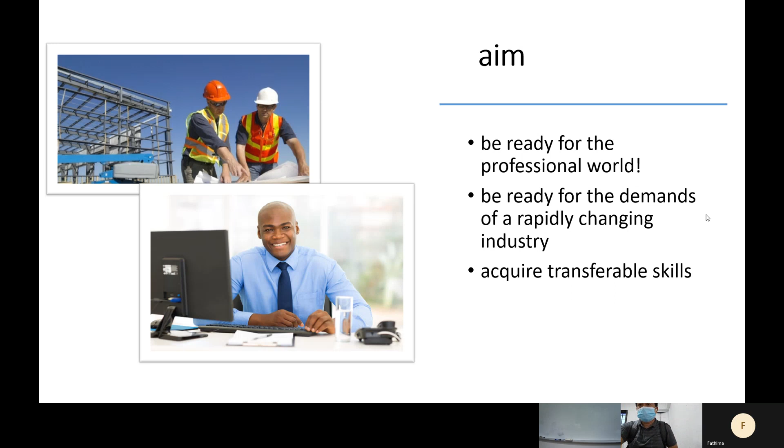So the outline of this course is like concept design of the structure, loading, design actions, timber beam design, RC reinforced concrete slab design, steel beam column, composite structure design, finite element simulation using ANSYS.

So has anyone got any experience about the finite element simulation? You have, right Daniel? Yeah, we did it for the design analysis module. Oh, we did it just before where we did it with hydraulics, so it's the influence of fluids on structure. Okay, it's hydraulics. So in your real working experience, do you touch any finite element? No. Okay, way outside of our wheelhouse. Oh okay, yeah I see.

In the designer's world, we ask the question, why does this not work? Please tell me why this doesn't work. Yeah, that's where we end up. So any other classmates have any experience on the finite element simulation? No. Okay, so it's quite a new topic for you.

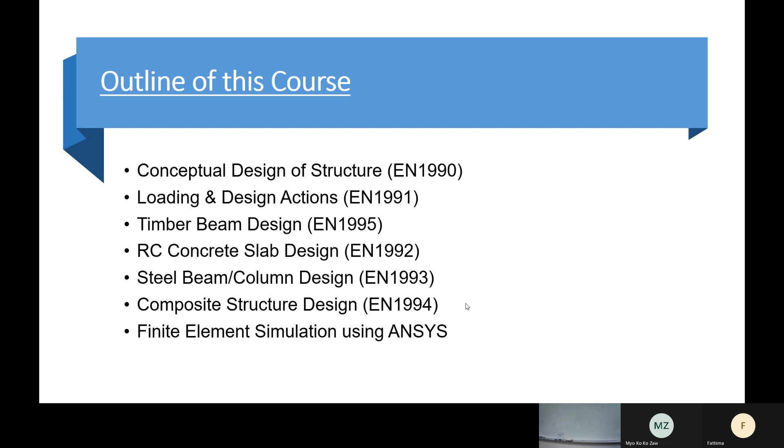Before we do that, I don't have a clear idea of your background, like mechanical background or your understanding of basic concepts in civil engineering. I hope you can let me do a small game-based test. It's simple, no marks. It just lets me understand your background more so I can adjust my pace, even my schedule and organization of the slides, to help you learn more easily.

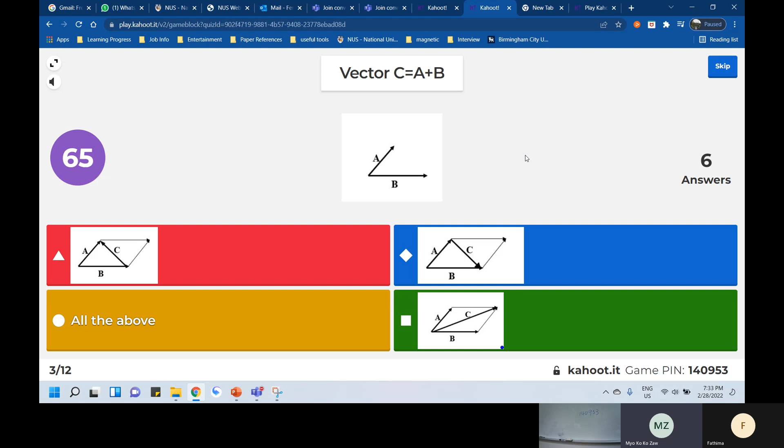We have 6 answers. Okay, no problem. Pin is 140,953. Okay, we continue next. Total, I think around 10. So then climb up again.

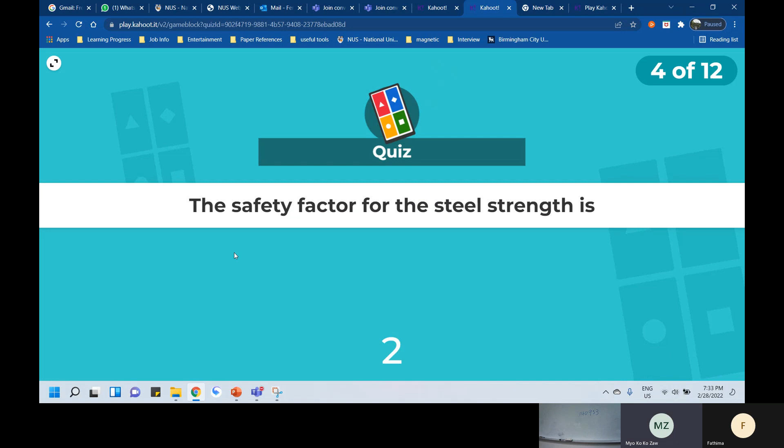The safety factor for the steel strength. Not sure you remember this value, or whether you are familiar with what is safety factor for steel strength. It'll be the connection. Oh sorry, it's got a bit loose, sorry.

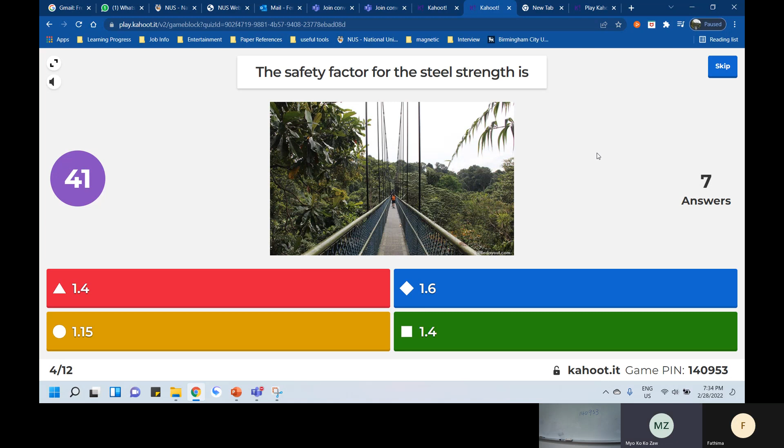I have 5, 7. Okay, at least you should understand what is safety factor. So this is more important. The value maybe you don't remember so clearly, it's okay. So I want to highlight is a safety factor. Never mind, okay, the new one come up.

Let's see one: the main failure of the slender beam, slender column. Is it compression failure, buckling failure, bending failure, or none of the above? Slender column. So some concept is a slender one. You see, yeah, never mind, it's okay.

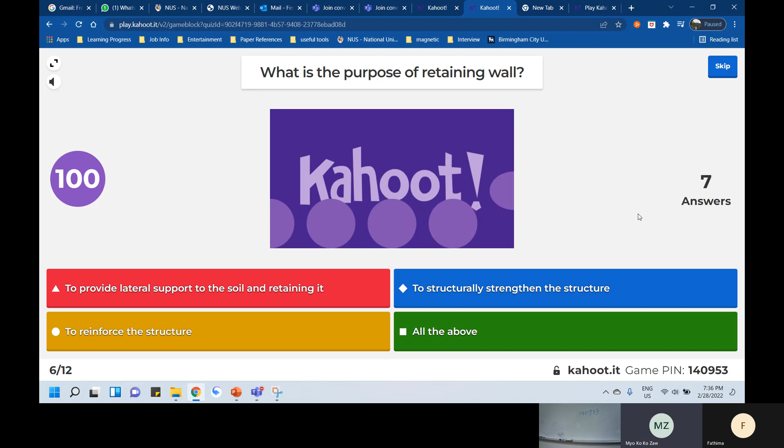Okay, let's see the next one. Retaining wall, it's more like some geological or something. Retaining wall, I think the... okay, this one actually a lot. Okay.

Let's see the 7th, this is another definition. It's maybe some basic one. If you don't know, it's also okay. It's just to let me know your background or something. Short unbraced column. It's okay, just think of it as a game. It's anything, it's just a...

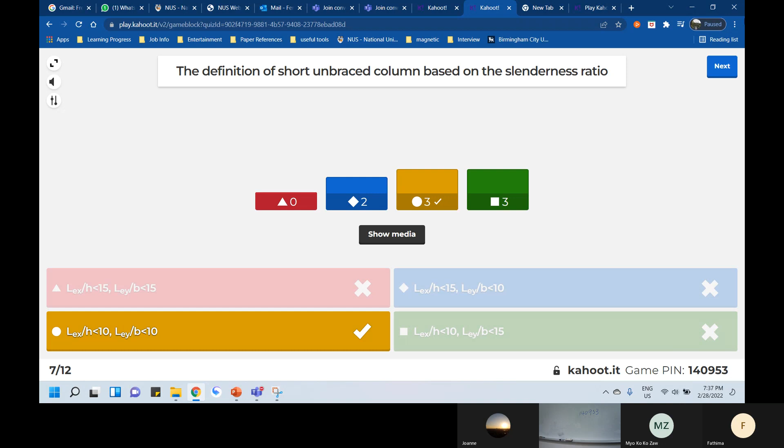I will see the report, it's very useful for me. So try best to do. I think it's just the value. You know it, choose the smaller one. Okay.

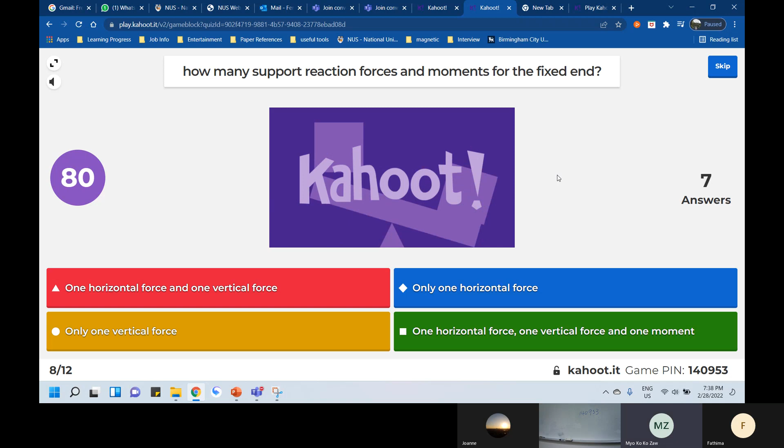Support reaction forces and moments for the fixed end. What is fixed end? Reaction forces and moments for the fixed end. We have the roller supported, simple supported, pin supported, and also fixed end. Okay, still up here.

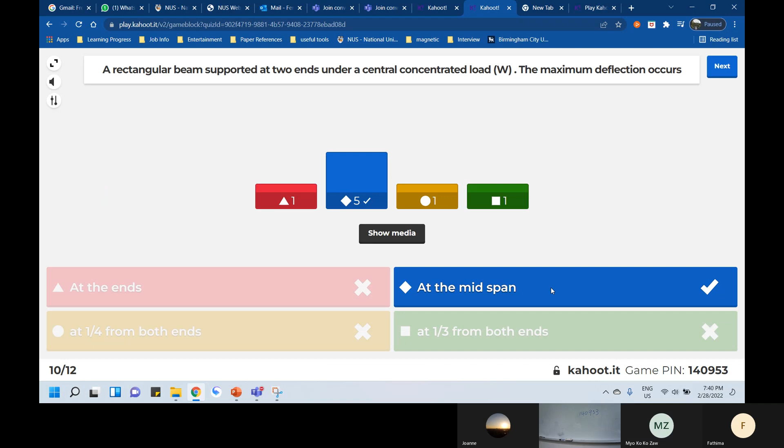Okay, so this is... okay, done. Okay, final two: which one is the serviceability limit state? I'm not sure you are familiar with the serviceability limit state. This one we also will explain today about serviceability. Okay, only one, no problem. Today we will explain more.

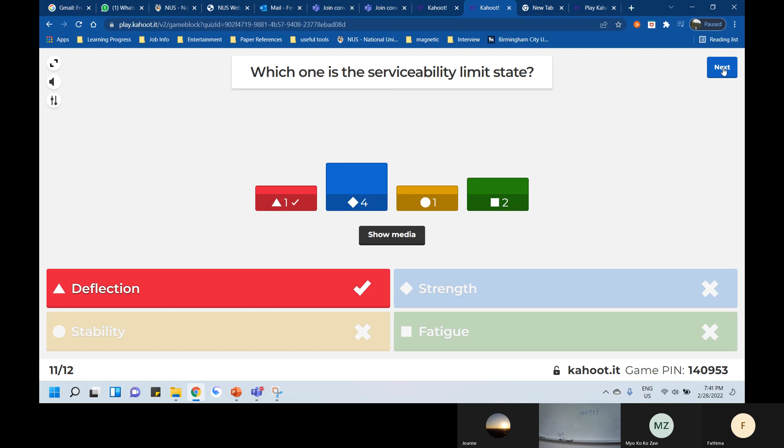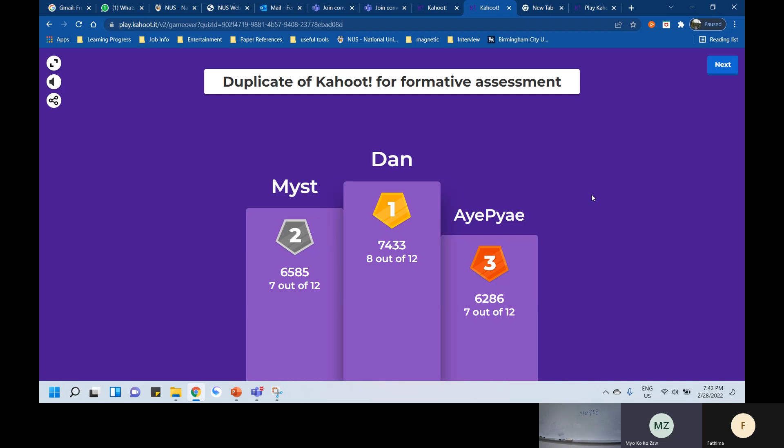Okay, that is ranking number one, so good. Actually it's correct 8 out of 12. So 2 is Myst, and AyePyae is 7 out of 12. But it's okay, it's just a small game to check your understanding or something. It's just for me to see... for example, I will see the report. It's for me about your understanding, especially like the mathematics, the concepts, or any mechanism you don't understand.

So something I will highlight and enhance in the slides. Okay.

Okay, so this one also you will check. This is some, how to say, fundamental concepts we will actually use in the design work. Even we use some moment diagram or shear force diagram, we will use it. And even when we use software, we don't need to understand so much, but it's better for the engineer to understand the background philosophy behind the software, so we can also check by ourselves whether the software is correct or not. So it's not just learning how to use the software, but to understand the mechanism.

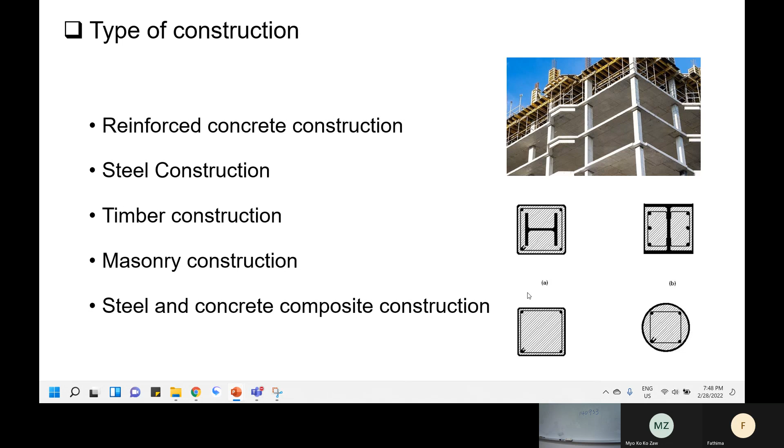I'm not sure if you've heard of Richard Liew. He's a quite professional engineer, also a full professor in NUS. He's quite famous for steel concrete high strength composite structure construction.

For example, steel and concrete composite structures are often used in bridge structures - highway and railway bridges. They have a higher span to depth ratio and reduce deflection. Deflection is actually something I want to highlight.

Deflection, as the question implies, is like when we have a beam - if we have a concentrated load, it will take on a curved shape. We call this deflection, which is just a deformation. Through these composite structures, deflection is reduced because deflection is actually a design limit - it's a serviceability limit state design consideration, and we want to reduce it.

This figure shows some work done in a NUS lab. This is a quite common setup with shear studs and shear connectors connecting the concrete with steel plates. This is the typical composite beam.

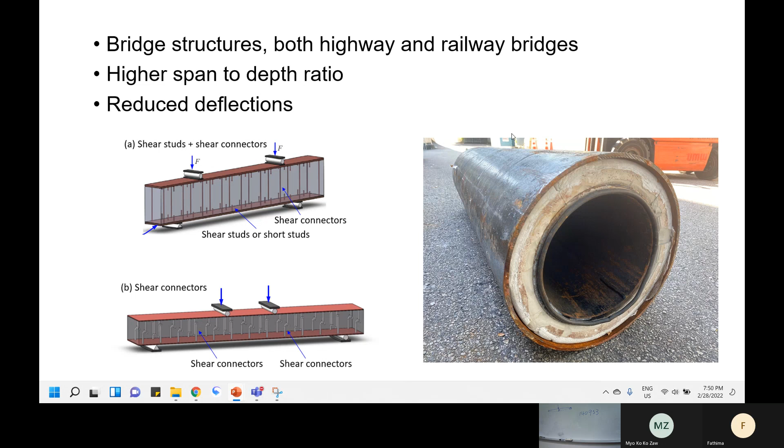This is another project, for a pile. The outside is a steel tube, and inside there's also a steel tube, with concrete between them. This is a typical steel and concrete composite structure, a little bit different from reinforced concrete structures.

In the design codes or standards, we need to consider all the different design situations, starting from the transient design situation. It's a period much shorter than the design working life, usually during execution or repair - a short term effect. Then the persistent design situation is long term, usually after we finish the execution or construction. A building must have a design life like 50 or 100 years, so these are long term effects.

In places like Indonesia, Japan, or China, we have the seismic design situation because earthquakes can cause quite large damage. And there's the accidental design situation - in our construction we consider it, but it's more common in defense construction, civil defense areas, especially for explosion or fire resistance. In Singapore, civil defense has many projects checking concrete for bullet or explosion damage, and how beams, walls, and columns behave under explosion or attack. So we have different design situations in all the design standards, but today we'll mainly focus on the persistent design situation - long term, not considering seismic or accidental design.

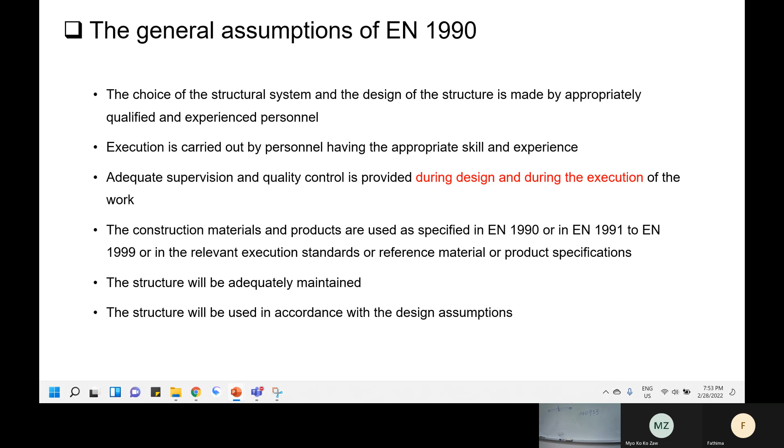Adequate supervision and quality control must be provided during the design and execution of the work. As a design engineer or structural engineer in the design phase, your responsibility is quite important, because almost 20% of failures, like for bridges, are caused by design civil engineers doing wrong calculations or not considering enough actions in reality, which causes failures.

This is some requirement, similar - it's to sustain all actions. No need to remember, just understand: meet the specific serviceability requirements - structural resistance, serviceability, and durability.

The structure should be designed and executed such that it will not be damaged by events such as explosion - this is accidental design, impact, and also the consequences of human errors.

So can any students tell me your understanding of human errors in design or construction? Have you encountered any human errors that caused disaster or damage to structures? It was a setting out error - piles were put in the wrong places. They had to recheck the beam to see if the span still worked with the pile in a different location, and the beam still worked because of the safety factors. So following the check it was okay, but the safety factors allowed the capacity in the beam despite the pile being in the wrong place - purely down to the setting out error, a human issue. Any other human errors you think of or have encountered in any phase?

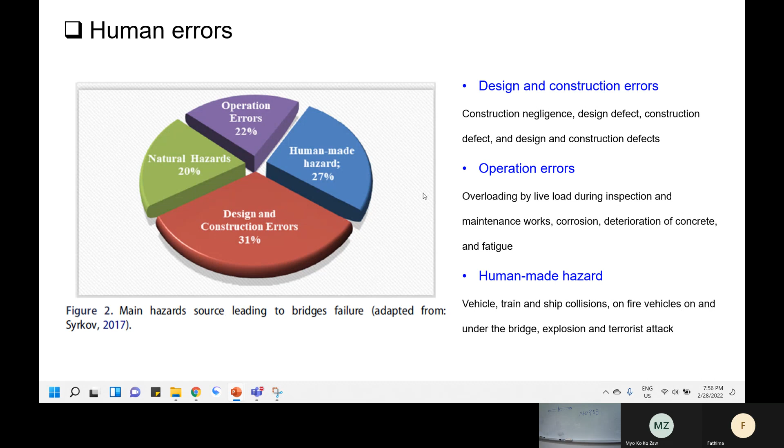Another requirement is the choice of suitable material, appropriate design, detailing, control procedure, design, production, execution, and use relevant to the particular project. These are not just words, they are real research or engineering topics we work on, like developing new 3D printing concrete or concrete made from solid waste. So this is the choice of suitable materials.

Appropriate design and detailing - have you encountered building information modeling, BIM techniques? Usually we want to combine design and construction together in a software. BIM is a hot topic now, along with specific control procedures for design production, like automation or tools for different production execution plans. There is a lot of work behind these different requirements.

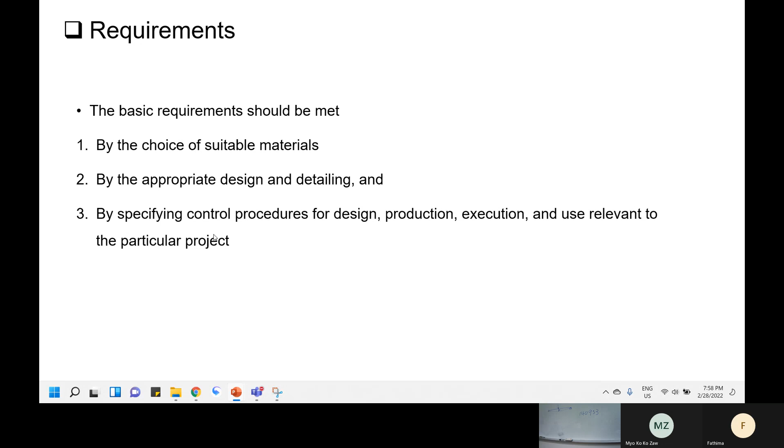Next is reliability. Do you encounter any reliability concept in your life or experience? Or do you think why we need to consider reliability? Any ideas? More cost - reliability is about controlling the cost of this project. Controlling the cost, okay, maybe any other source?

Reliability is being able to plan. If you know something is going to happen consistently, you can be efficient, and make it cheaper over the long run. You know it's going to work that way, and in a system it might be how a beam works, reducing maintenance, paint spec, all those kinds of things. You know it will work for a certain period of time, so you can plan ahead and make that more efficient long term.

Yeah, that's a good try, but that's not quite why we need to consider reliability. Making a plan is good for efficiency and securing the schedule, but that's not really why we need to consider reliability. Any other source? What do you think is the meaning of reliability?

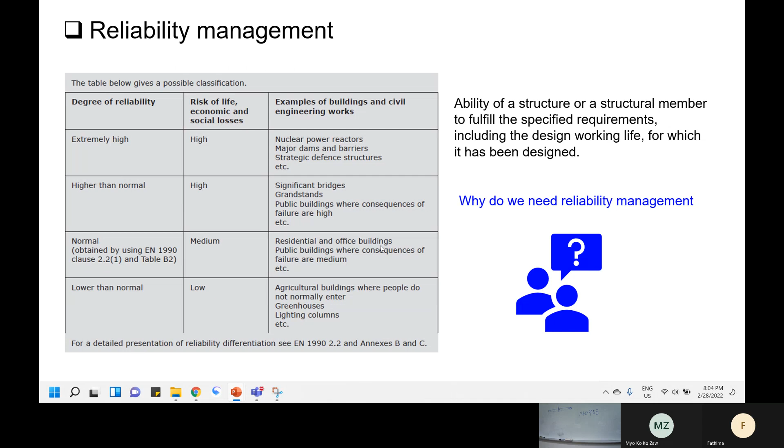Okay, maybe before we take a break, let's watch a small video just to give you a hint of the next session.

So this video simulates the Titanic sinking. The question is: what types of failure occurred in the Titanic sinking? What do you think caused the failure of the Titanic, or during the breakup, what failure, consideration, or mechanism caused the failure of the Titanic?

Any ideas? Collision with the iceberg? Yes. Then leakage, flooding? Yes. Any other thoughts? As soon as it lifted the tail into the air, it couldn't take the bending, so bending failure occurred due to moments. The ship itself wasn't designed for that much weight cantilevered from the sea, at which point it failed.

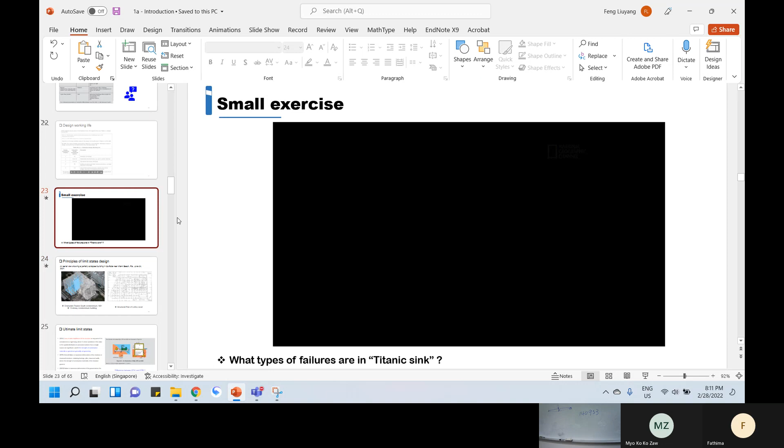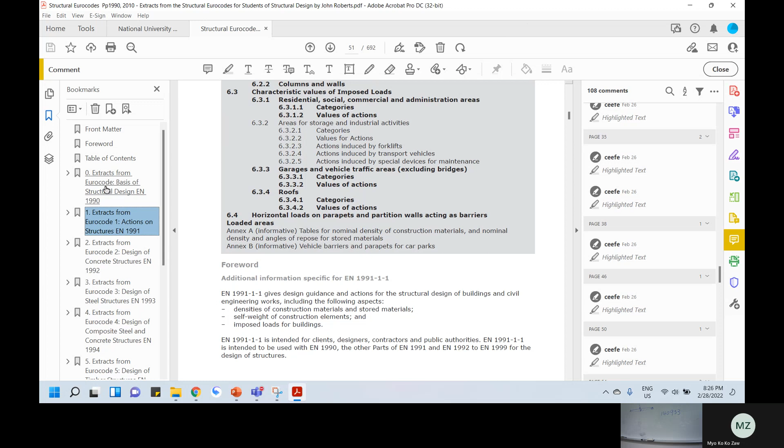So for the Eurocode basis of structural design, there will be a file called the structural Eurocode. It's a summary combining different parts like 1990, 1991. It's more summarized, compressed and concise work of all the Eurocodes. So you can learn from this one, using it to learn new concepts and understand them, because every Eurocode has a lot of concepts, too many formulas, and it's not easy to understand.

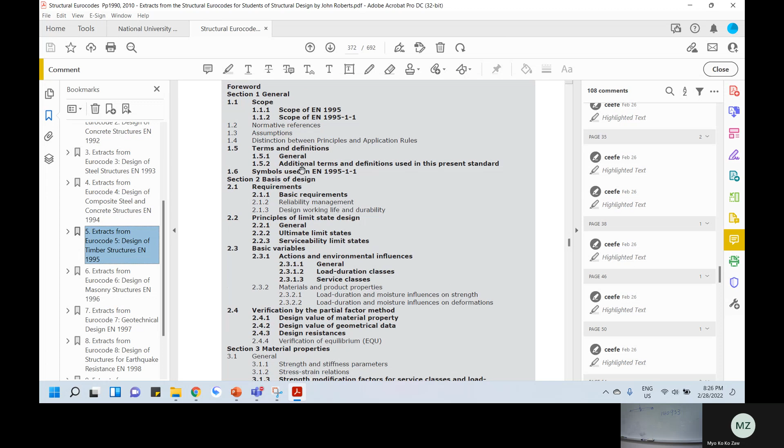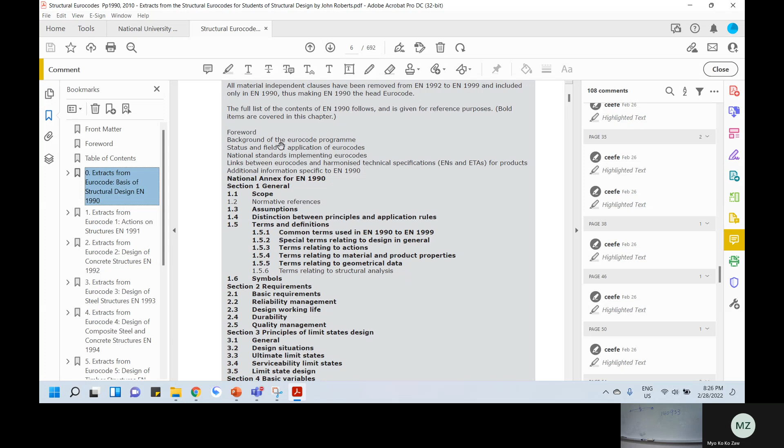I suggest you use this one first. It's in the link I sent you, the Eurocode basis of structural design. Then if you have the structural Eurocode 1990, this one extracts from the structural Eurocodes. This one is maybe the starting point, easier for you to learn all the key or critical things of all the Eurocodes. But it still has a lot of formulas and concepts to understand.

So actually, I believe for you guys, the course is just some effort to read it and understand it, not so many difficulties. Just start reading it, to understand it. For this course, our design is only a 3-story frame design using ANSYS.

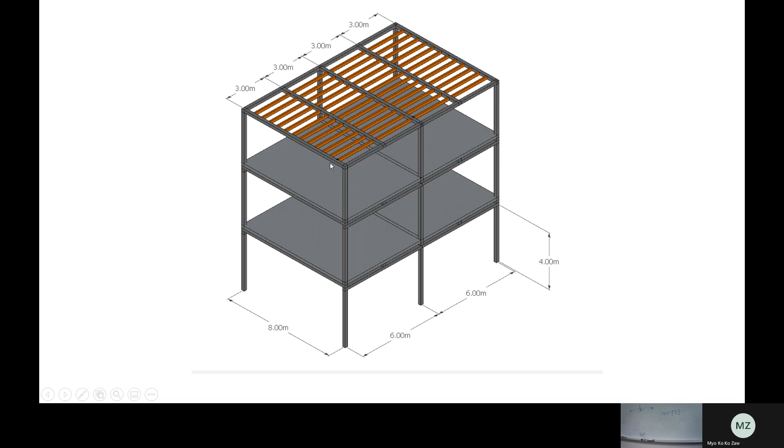It's much easier just using the software. The main thing in the software is how to build this geometry, how to give load, how to do the analysis, set the boundary conditions, then let the software solve the other things. You will get the solution - every location's stress, displacement, strain - because it's not so much relating to analytical or mathematical issues.

Okay, our next session will mainly focus on limit state design. This is the main concept or key concept in design. I'm not sure whether you heard this news - in Miami Beach, Florida, USA, in June 24 last year, a 12-story condominium building suddenly collapsed.

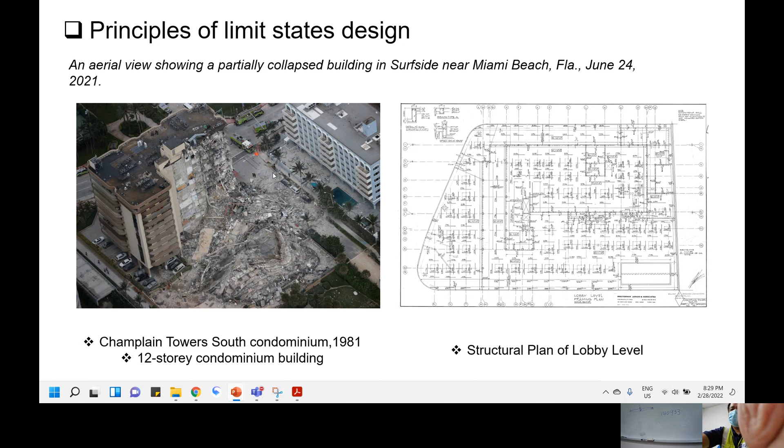Part of the building collapsed. This is the original filled building - if you draw the original one, it looks like this. Almost half this area collapsed. This one is a quite typical frame building. As you can see on the right, the structural drawing is just a lot of reinforced concrete columns, beams, and some walls.

So it's a typical one, more complicated than our assignment or coursework, but it also shows us how we should design to avoid this collapse based on limit state design. Limit state design divides into two parts. Let's draw a framework for today - one we call the ultimate limit state design.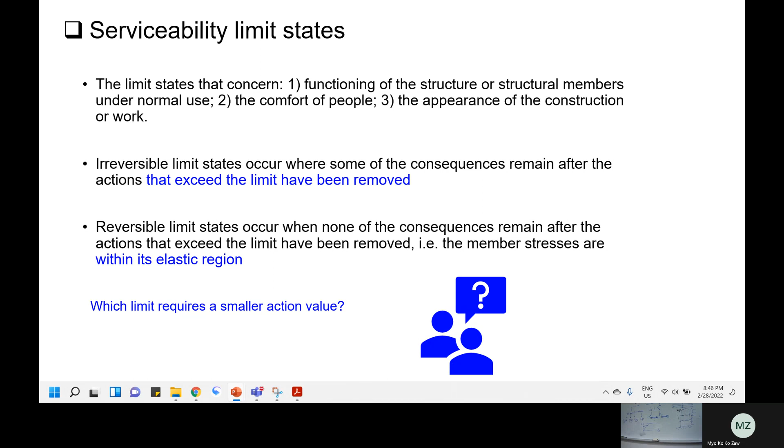So today is mainly this one, the different concepts. I hope you can understand the different limit state design definitions. The formula for different limit state design will be elaborated next, this Wednesday, about the different equations. But today, first understand the concepts of the different limit state design.

So let's do a small question. Which is ultimate limit state design, all these things? Which is the ultimate limit state design we should consider? Fatigue. Strength, come on. Stability.

Which is the serviceability limit state design should consider? Deflection. Durability. Local damage, local damage.

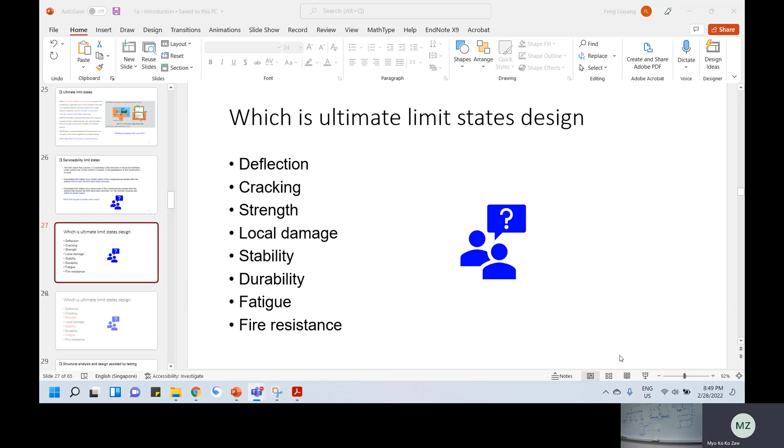So in this way, cannot see - you cannot see the book, that's very small. Oh sorry, the PowerPoint slide I can see, yeah. Oh sorry, give me a second. Now you can see. But still small, it's okay, never mind, just too small to see the PowerPoint slide. Later I'll take a picture for you.

Okay, so how do you guys think about the ultimate limit state design and serviceability limit state design? So deflection is what? Serviceability. Deflection means deforming the shape, the bending or sway or something. Yeah, deflection is one of the deformations, so it's for the serviceability limit state design.

Cracking is relating to the appearance of the structures, so it's also serviceability limit state design. Strength, we call STR, is relating to the ultimate limit state design. Local damage also relates to cracking, so it doesn't belong to equilibrium, STR, geo, fatigue - so it's also serviceability limit state design.

Stability is about the loss of equilibrium, so it's ULS. Durability is serviceability design, fatigue is ultimate limit state design. Fire resistance is for the comfort and safety of people, so it's serviceability limit state design. So of all these, only strength, stability, and fatigue belong to ultimate limit state design.

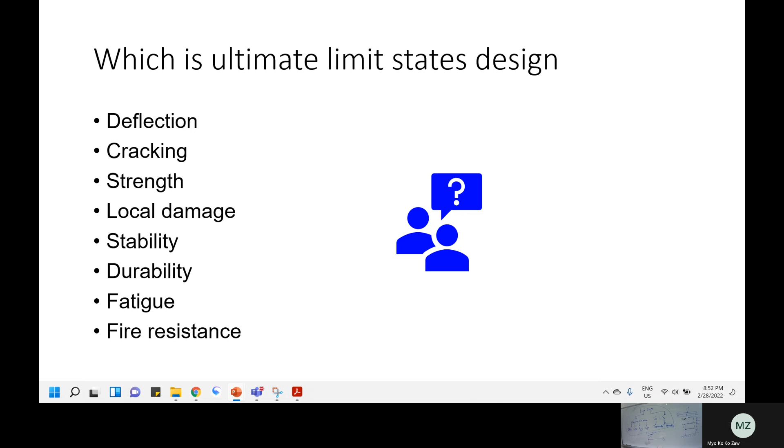Based on this design, what we need to do is the analysis of the structures based on different principles. So structural analysis and design assisted by testing is what we will do, and it is also included in the standards and codes.

The first one is structural modeling. In the codes or standards, we have a lot of equations and formulas. Where do these come from? From the experience of engineers, and also from structural modeling. So calculations shall be carried out using appropriate structural models involving relevant variables. For example, we can use FE analysis to do the structural modeling, which we will do in this course.

They also need to consider static actions and dynamic actions. Static action is like the density of the structure or the self-weight of the structures. Dynamic actions include wind load, wave load, even seismic load, because static and dynamic are quite different in terms of amplitude. Static, the amplitude or load is almost constant along with time, but dynamic has some variation, it will show like this. So seismic design needs to consider earthquakes, or even wind load. In a bridge, there will be some vehicle load. So these are called static and dynamic actions.

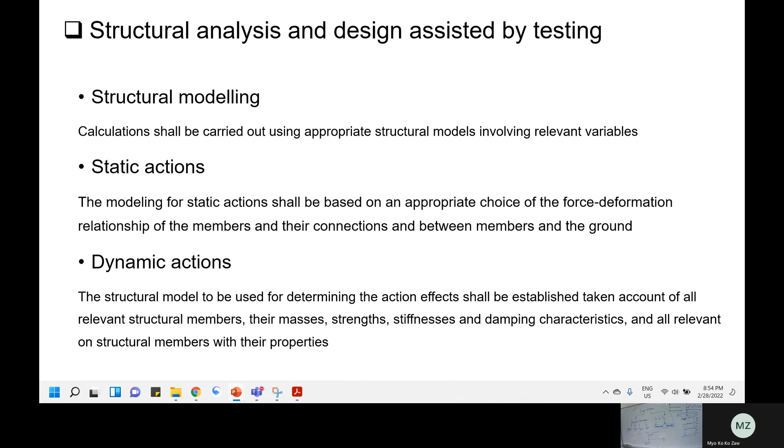This one, no need to remember, just to help you understand more. Ultimate and serviceability design - these are the general steps here. I show this for your reference in the future, maybe if you're interested in research or more work you can do.

The first step is determination of the loads or actions. For example, we want to build a building in central Singapore, the CBD area - say a 12 story condominium. We must understand the conditions of these areas. So we need to decide the loads or actions: whether the wind load is big or not, how many people will live here.

Of course, in offshore and marine structures, it may involve wave-induced loads and wind-induced loads. In mechanical areas like semiconductors, we may need to consider thermal action, because for semiconductors the temperature may go up and down, which will also cause deflection or deformation of the small parts. So first, determination of the loads or actions. For this part, we need to consider uncertainties relating to reliability, statistical distribution, characteristic and design values - these new concepts we will elaborate on in the following courses.

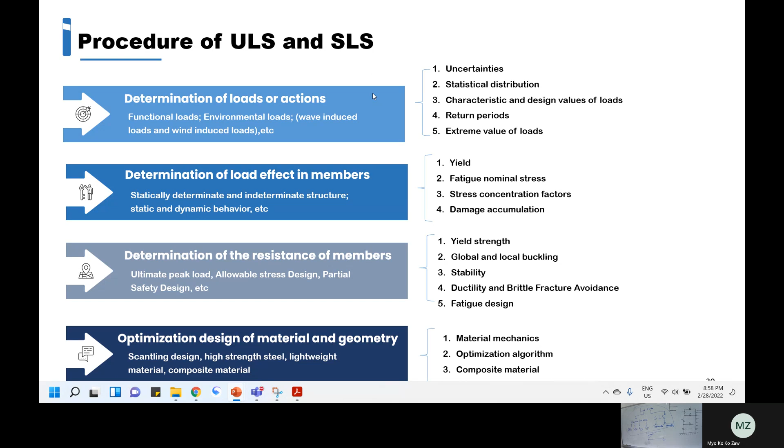Next we do the initial design, then go back to do the optimization. We improve our design cycle by cycle, by different engineers, we improve it. Finally, we get a final design of the 3-frame building. So it's similar to your work assignment in this course.

Other thing, no need to remember this one, but remember it's a concept I already explained. So how we do the design, we have different methods. For example, we can use analytical approaches, experimental approaches, numerical approaches.

So this is the concept of ultimate limit state design. I use experiments - not sure if you've seen this one or not. This is the member, a small member, clamped on the two ends, then pulled. If we pull it, we will get the strain and stress, following this curve.

As you can see, it's first elastic, then plastic, then final failure. So they have different stages. This is yield strength, and this is ultimate strength. So the ultimate limit state design is for this one.

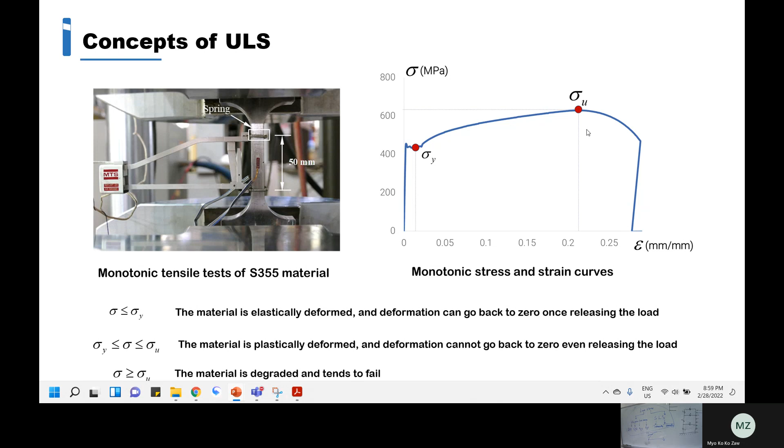We must make sure the stress on the member is less than the ultimate strength. So it's stress less than strength. Strength is a material property, stress is the external load. So these are different methods we do.

Do you guys still remember this one? The stress is equal to moment divided by the moment of inertia, times y. I'm not sure if you still remember how to determine the stress.

Let me draw this one. So if it is a beam, under a load, the beam will have a moment. We call this M, it's a moment, a couple moment. Then the stress on this section - stress equals the moment times the geometry parameters, times the location of the stress.

For example, this stress here - this is stress because stress is linearly distributed, not uniform, caused by the moment. So y is this, this is x, this is y. Based on the different y location, the stress is different. So you can say stress is caused by the moment, and moment is an external action.

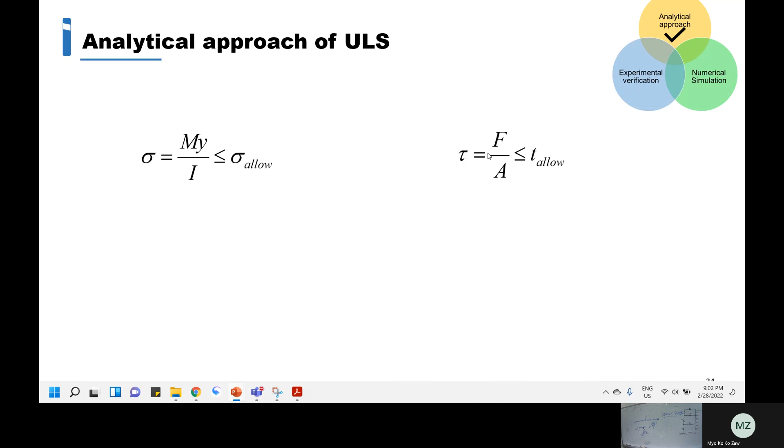Then tau, we call tau the shear stress. We will also have a shear strength, but this is not part of the basic design concept.

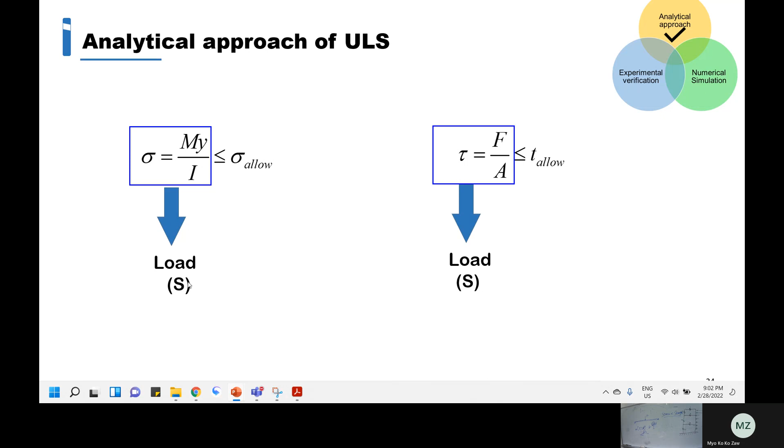So we always see the load, which should be smaller than the resistance. The right part is the resistance of the material, the left part is the external load. So usually the load effect should be smaller than the resistance. This is the key principle for all design, whether it's ultimate limit state design or serviceability limit state design - all need to meet this one. The load should be smaller than the resistance.

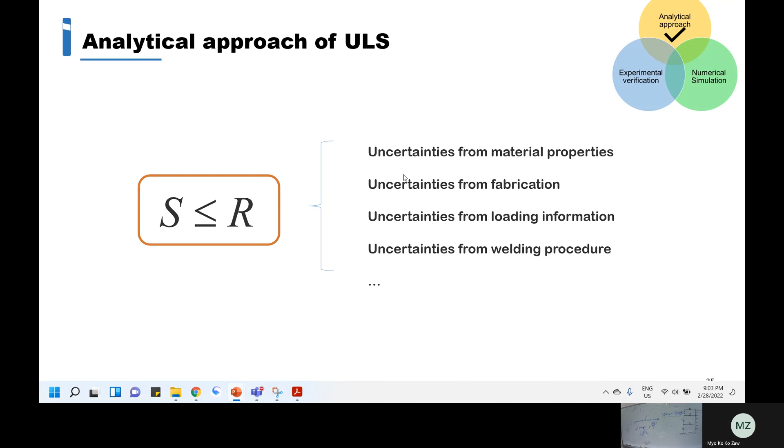Of course, based on this one, we can do a lot of work, even research, on uncertainties of fabrication, because it has uncertainties. So we will have the probability - no need to remember this one, just for information. It has a distribution for different members.

That comes into our safety factor or partial factors. Partial factor or safety factor considers the uncertainty in the loading and in the material properties. This we will explain in more detail in Wednesday's lesson, but it comes in - the logic is from this one. If we consider different uncertainties, it comes into the partial factor and the safety factor.

That's why in the previous small game, I called it the safety factor of the steel strength. I'm not sure if you still remember - safety factor.

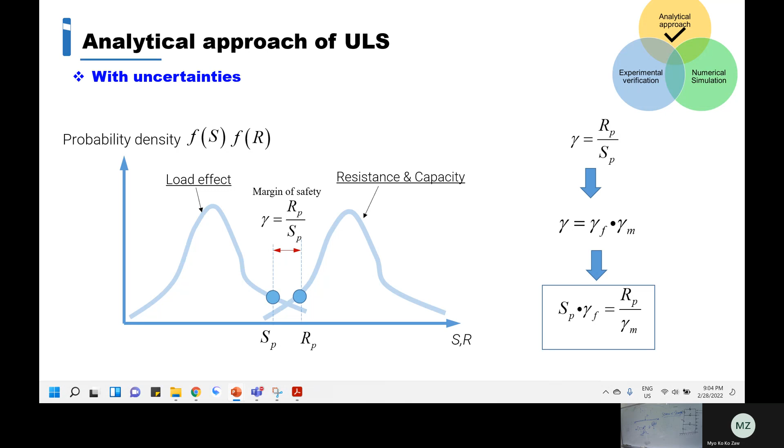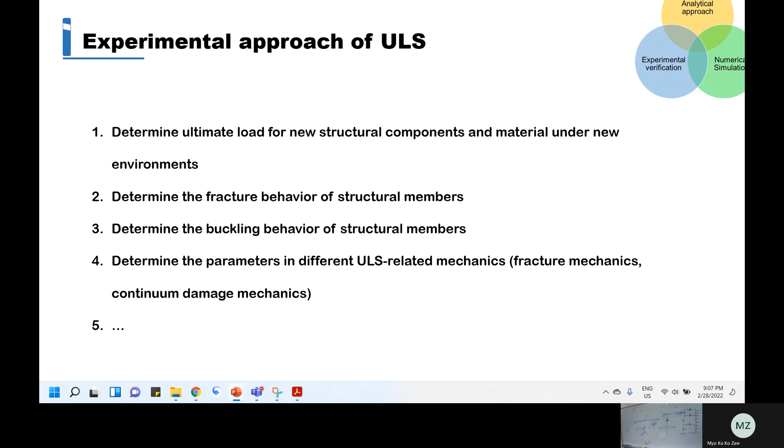We do the numerical simulation to simulate the failure. Numerical is a simple and cheap way, because it just involves working in front of the laptop or workstation - key in the parameters, build the geometry, key in the load, then let the computer solve it. But experiments will take a lot of time and money, so they're quite expensive, especially for new structural members.

For example, this bending test - just this one is around 30K for fabrication only. So it's quite expensive to do the test.

So this is numerical. For numerical work, we have different software. I hope you also encounter different software, such as USFOS - this is for offshore and marine applications.

This is ABAQUS. Another one is ANSYS, which we will use in this class, and also called MSC Software. So these are different software, but they all use the finite element method - their logic and philosophy are the same.

We will explain more about how we do finite element analysis in the computer labs. I think especially for structural design, we use a lot of software. Mechanical engineers, I think, also need to do testing and simulation.

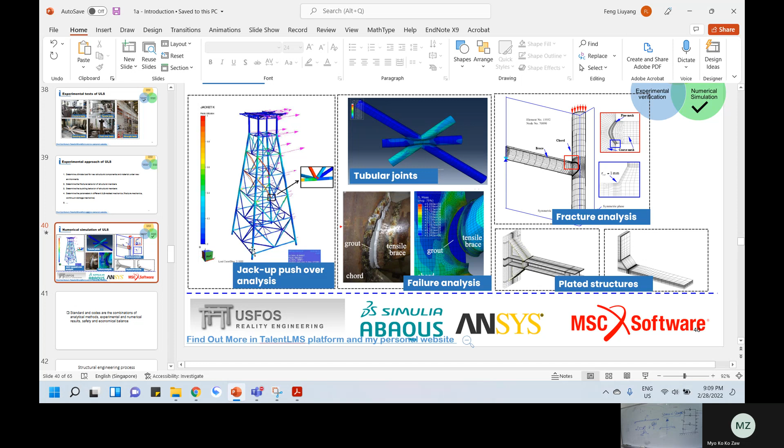In my opinion, standards and codes are a combination of analytical methods, experimental and numerical results, safety and economic balance. Codes are just some formulas, simple formulas, but they already summarize all the engineers' knowledge, research scholars' knowledge, even designers' knowledge together, to give you a formula that's easy to use.

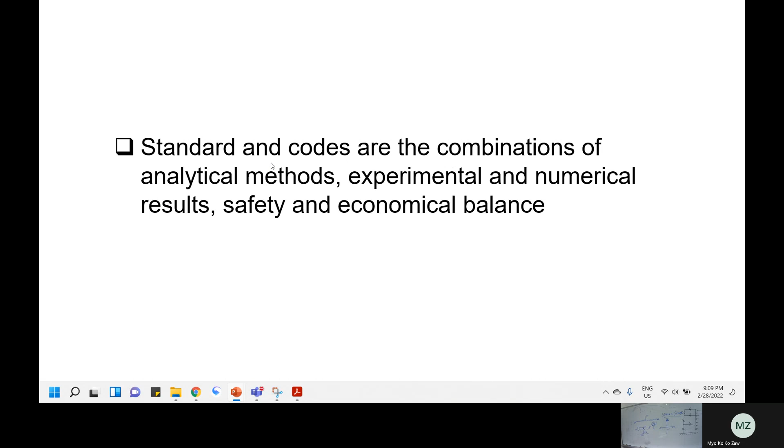So go back to the structural engineering process. First is conceptual design - we want to know what we need to design, what we want to build. Whether you want to use the design in the MRT, in HDB, in civil engineering, or in semiconductors - this is different. You must have a concept, and the concept is based on the principle of limit states.

Next is rough sizing of the elements - this can be used in finite element analysis, or also in analytical methods. We see the whole structure, but we cannot analyze it all together at one time. So usually we divide it into members and analyze one by one, doing rough sizing of elements to allow a basis for rough calculations.

Next is load identification - whether there's wind load, dead load, live load, lab load, or other conditions like seismic earthquake. We need to consider different loads, and also identify the maximum actions, or leading actions. For example, in a building, the dead load may be dominant, or the live load may be dominant - we consider different maximum actions.

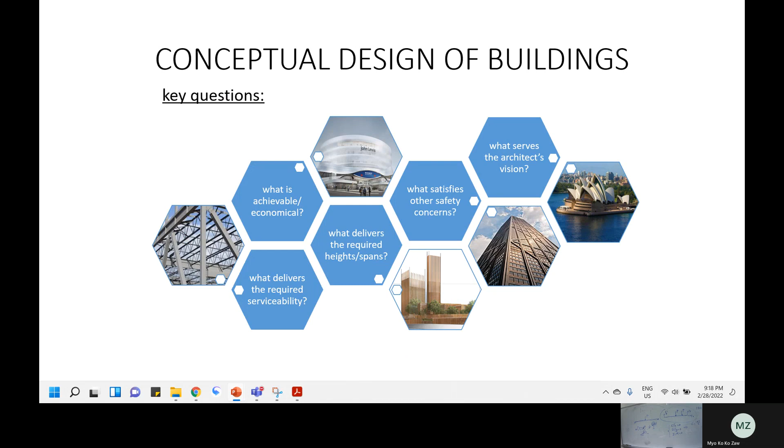Can you imagine, before I said we now have so many software tools here, but before 100 years ago, we already had so many buildings. How does a civil engineer do the design? They only used their hands to do the calculation, using methods like this one, but not so simple, using analytical methods to do the calculation.

So now as civil engineers it's much easier, we just use software. But we still need to understand structural mechanics, because between the software results it's better for you to check.

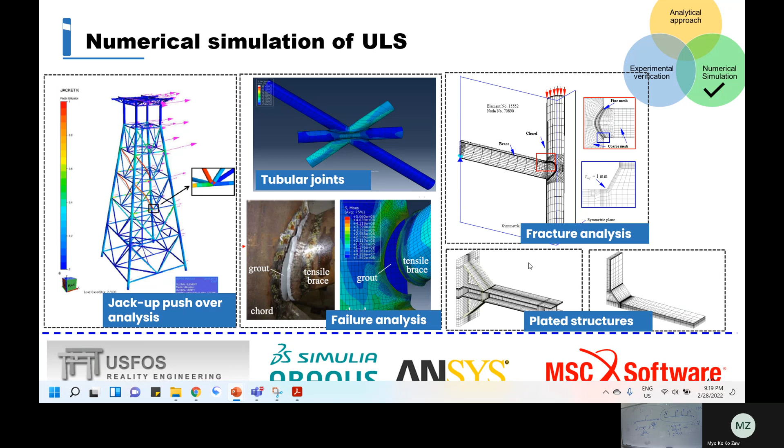These are all no need to remember, but I hope after today's lesson you can recall your slides or your notes, the free body diagram, structural analysis, the moment diagram, shear force diagram. It is helpful for your further calculations.

Then the structural design in this course mainly is to identify the maximum N, V, M, sigma. Do you remember what NVM sigma is? Usually we use N to reference what? N, and then there's M. First, let's go to M. Yes, moment. Sigma.

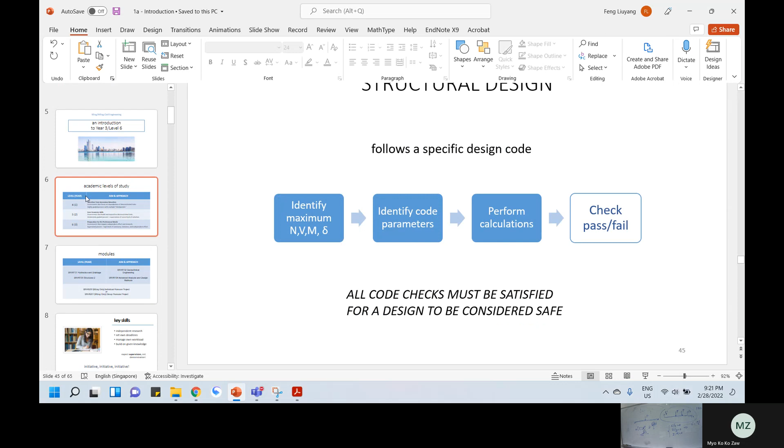This is called delta or sigma? I think sigma, right? Sigma, yeah. Oh, this should not be another sigma. This one here, sigma, let me recheck. I remember it's sigma, but I usually use delta to reference the deflection. Too many letters. Oh, delta, yeah, remember delta.

Correct, delta. Delta represents what, do you remember? Again, delta represents what? The change. Yeah, the change. So delta usually means the difference. But for me, this delta represents the deflection or the deformation. So M, you know, is the moment. The next is N. N like what? Still remember? N represents what?

It means the normal force. Usually we say it's the axial force. For example, with a beam, we can bend it. We also can have the normal force. Then the V.

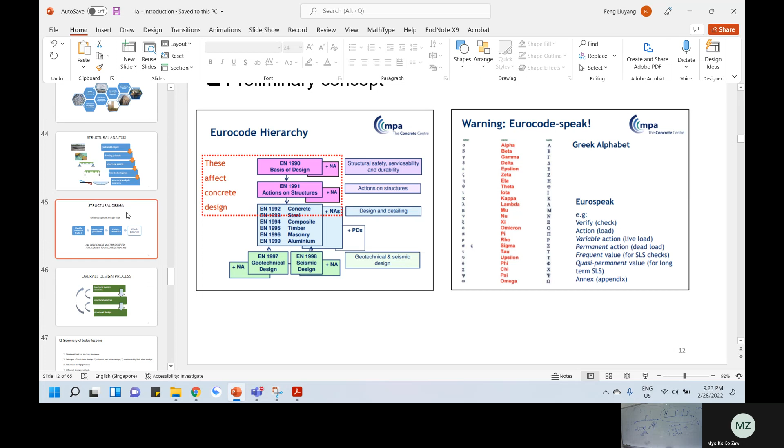So identify the maximum normal force, shear force, moment, and deflection. Then identify the code parameters. In Wednesday, you will see a lot of parameters you need to identify. Then perform calculation, based on the ultimate limit state design or serviceability limit state design, to check if it's okay or not.

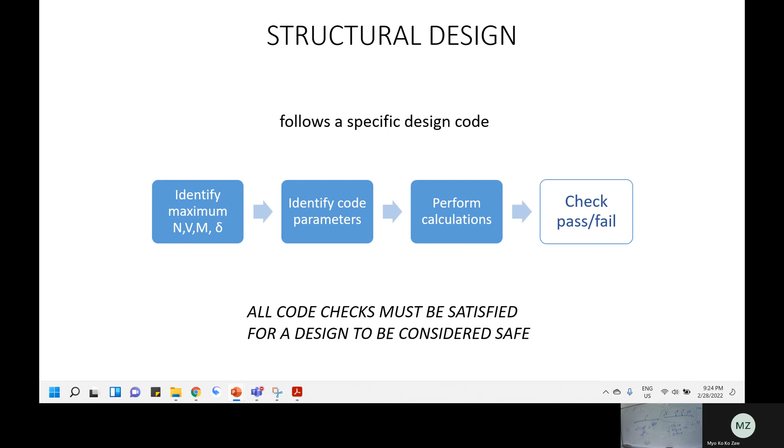Then the overall design process is structural system selection. You want the composite structures. Still remember in the first we see the type of construction, whether it's the steel structures, reinforced concrete structures, or the steel concrete composite structures. So you choose the different structural system. Then we do the structural analysis, whether you use your hand, just using the calculation by yourself, or whether you use software.

Then we do the design to see whether it is safe or not, to check based on the codes and standards. So this is the general steps we have.

Okay, actually for now, today's knowledge is done already. So a summary for today's knowledge is about the design situation. Do you still remember the design situations?

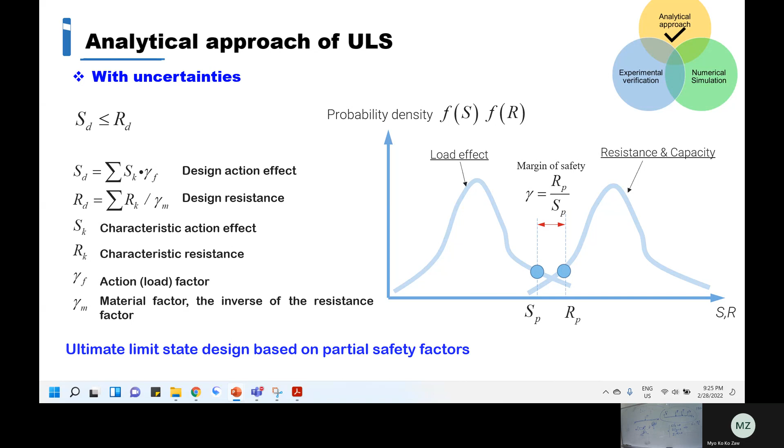Design situations? Yeah. Reliability. Daniel? It was, what was it? Transient, it was. Let's go back, we will recall. So I understand, so you already have a long...

So design situation, we usually will have the transient design situation, persistent design situation, seismic design situation, accidental design situation.

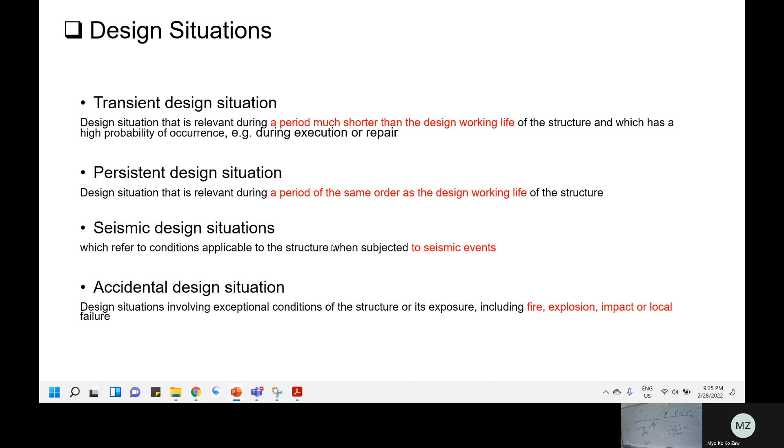Next, the structural design process, no need to remember. Just like this one, hope you can go back to recall your free body diagram, structural mechanics knowledge. I hope you can learn, maybe explore by yourselves. I believe you just watch some videos and it's already okay.

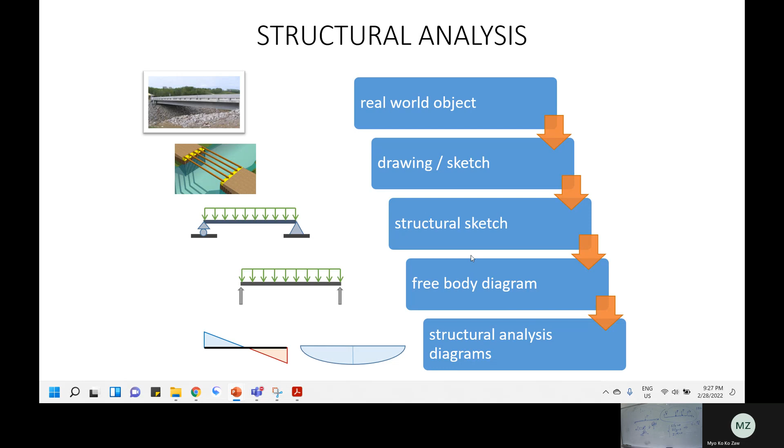Then it's different design methods. So based on different limits, what is the different design methods? We base it on experiments, we base it on numerical simulation like FE analysis, or we can only base it on the analytical approach. This method mainly is like the experimental test, like I showed the picture, we do the experiments, whether we're just using the ANSYS Abaqus software to do the FE analysis, or we're just using structural mechanics here to do the calculation.

Okay, so any questions about today's knowledge about these four concepts here? All clear? Okay.

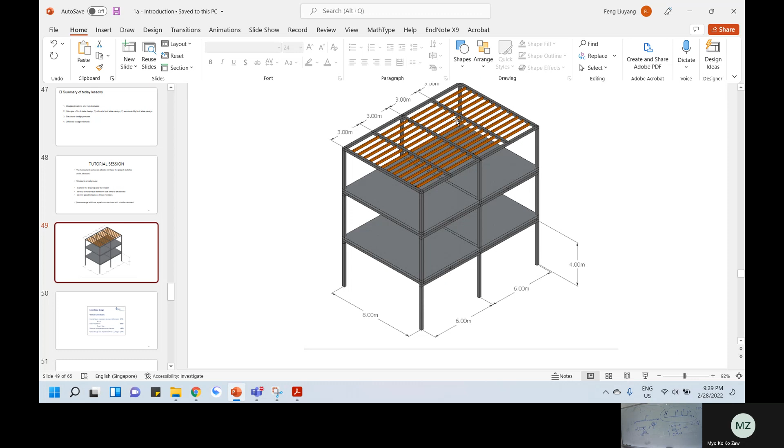Also identify the individual members that need to be checked. This is a course assignment. You must understand, identify the members. You need to check the resistance, whether it's okay or not. Identify different members and the load on them, whether it's concentrated load, linear distributed load, or area distributed load for different members. First identify the beam, column, or anything, then list down the members you need to check, different types, and also identify the possible loads on those members.

This picture, maybe I sent to the group chat, actually you also can have it. You still have 20 to 30 minutes, you can do these 3 tasks. Think about how to draw. If you have any question, ask me about the draw here. What's your concept? What's your plan to draw this model? Also identify the individual members, which member you should check for load or resistance, and also the possible loads on those members. So time is yours, start thinking about these 3 questions. If you have any question, just ask me. I will go around to check, give it a try, practice by yourself.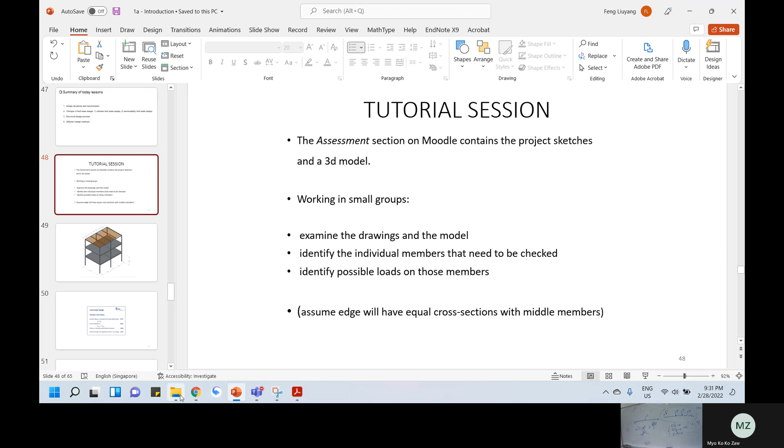I also want to highlight structural mechanics. If you're not familiar, make sure you recall some knowledge, like NVM, what it means and how to calculate stress. Because this Wednesday we will have a bit of heavy calculation, 3 examples to calculate the loads on different members. So you better have some pre-background or recall your knowledge on structural mechanics or basic fundamental definitions. I can also send you some slides before I taught about structural mechanics, so you can do a quick check about those things.

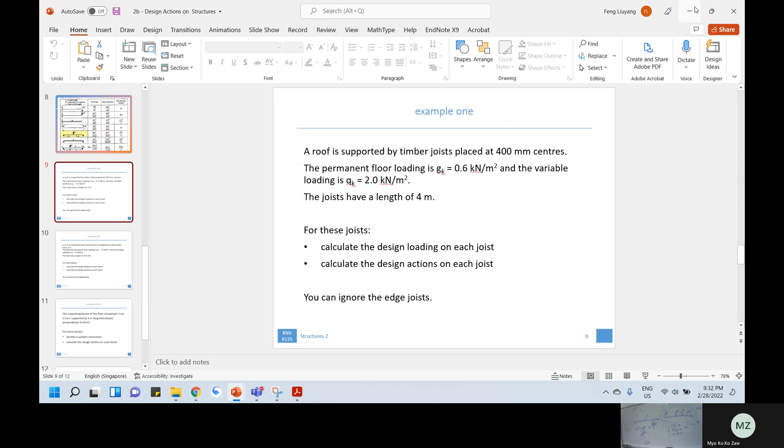So now your task is to do this tutorial session, based on the picture I sent to the group chat, to check the drawing, the model in the video. I will ask you your thoughts. I also need to remember your names, then I can call your names to ask questions, because the first time I cannot remember clearly.

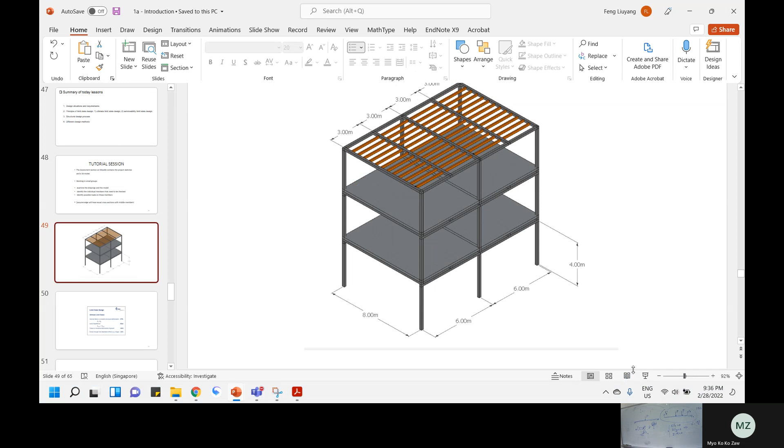Maybe I show you an example, you don't need to really draw it on your paper, just think about how you draw it in your AutoCAD or something. So have ideas. For example, the second one is identify the members you need to calculate. For example, this one, you can see the gray color. For example, a third story, we have this one.

So I ask you, this member, what type of load should it have? Concentrated load, linear distributed load, or other bending or axial load? For this one, the roof area, or which level? Roof level or slab level? Roof level, the top level, you can see the top.

I drew like one beam, one small beam. So the load on this one should be like what? Is it only for own weight? Then consider some superimposed loads, some live loads.

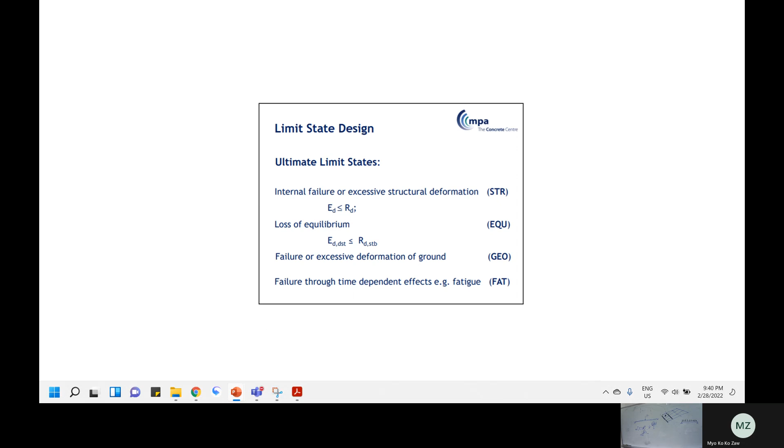So this is a tutorial. Identify the individual members that need to be checked. Continue, you do other types of members. If you have any questions, whether the load is okay or not, the type is okay or not, ask me. We can discuss the slabs, columns, whatever. Think about it by yourself.

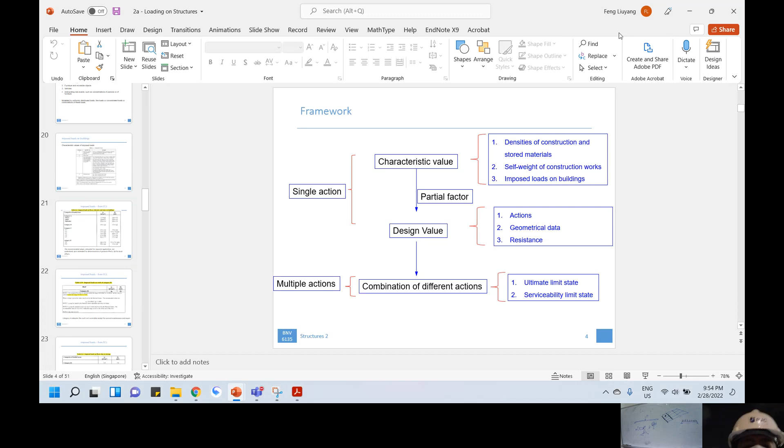Just one question - how is the model structure made, by ETABS or just using SketchUp? I think this model drawing is using SketchUp, but no need to draw it yourself - you will draw it in ANSYS.